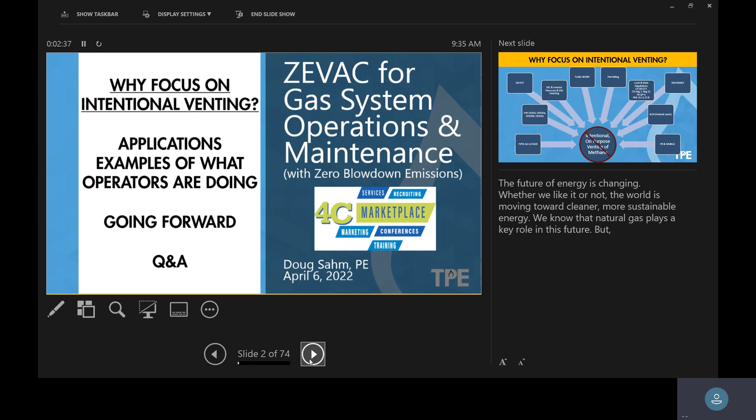So let's see. Is this gonna go for me? Let's see. So we'll start off with why intentional venting. And the short answer is there's a lot of reasons that intentional venting matters, and from our perspective, it should get focus.

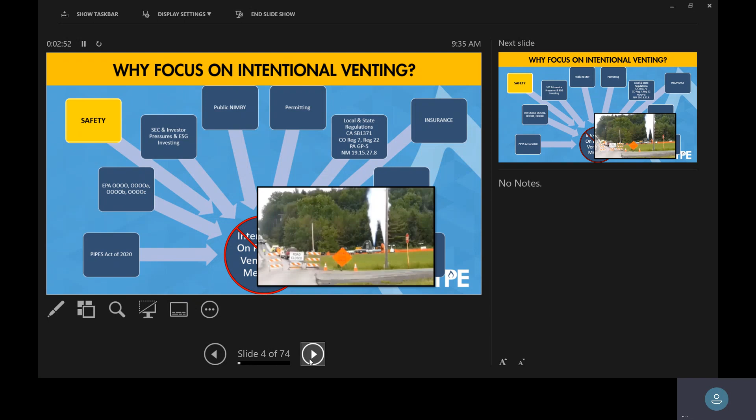The first is safety. So what a lot of people don't know is one of the worst industrial accidents in the history of the world, in general, was a chemical spill in India that takes number one, killed a couple thousand people. In the top 3 to 5, arguably, was an accident in Mexico in 1984 where a facility had both venting activity and flaring activity happening in separate corners of the facility, and due to the conditions that day, it didn't dissipate. So you ended up with a huge vapor cloud that eventually hit the other side of the facility where you had flaring activity, and it destroyed an entire town.

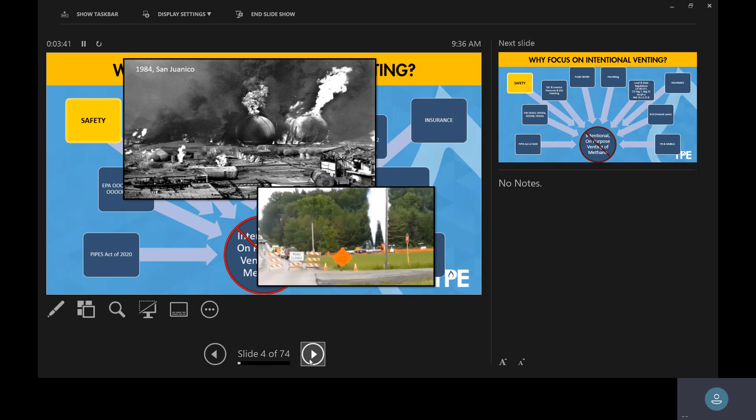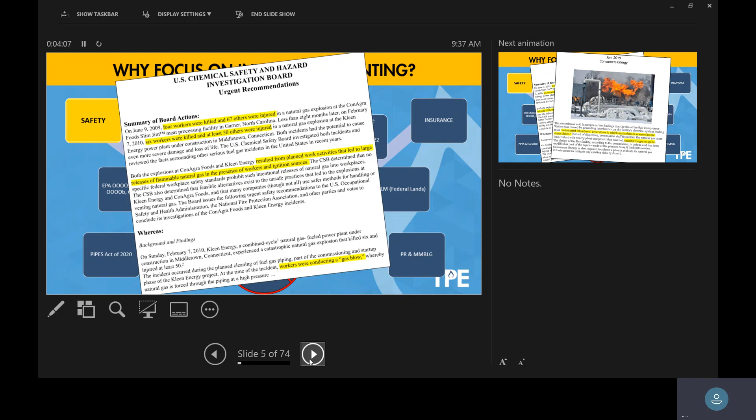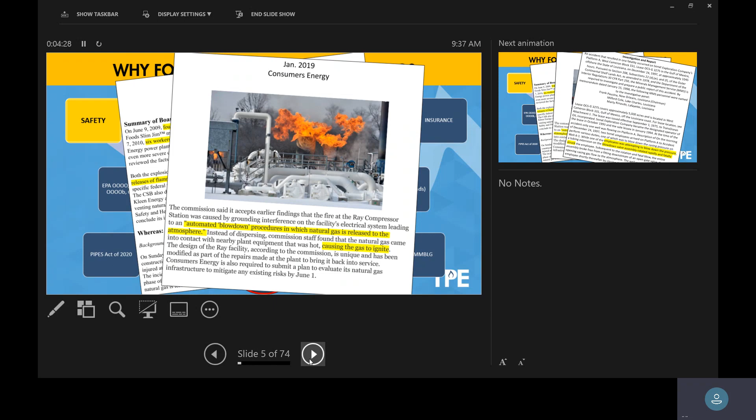So venting has an inherent risk to it, because anytime you release, you create a fuel air mix, right? You are putting two parts of the fire triangle together on purpose every time you do this. And you're hopefully spending a whole lot of effort making sure that third one, the ignition source, isn't there, because otherwise you got the two. So, if you look through the NTSB and the different accident reports, you'd be surprised how many times you have something like a blowdown or a vent or a valve that gets left open, and you introduce that third part of the triangle, and all of a sudden you're there, right? So every time you vent, you have a safety situation, whether you like it or not. You got two out of three present.

So we believe safety is sort of the precursor, and that's what drives a lot of what falls out, which is a bunch of regulation, right?

So our industry tends to see safety leads to regulation like the PIPES Act, which is now being... anybody on DOT pipe, PHMSA? Yeah, so Section 114 of this rule basically says you've got to have an O&M manual update that addresses emissions. You can't do nothing. You have to do something. We're not telling you what, but you've got to do something. So figure it out. So that's in effect now.

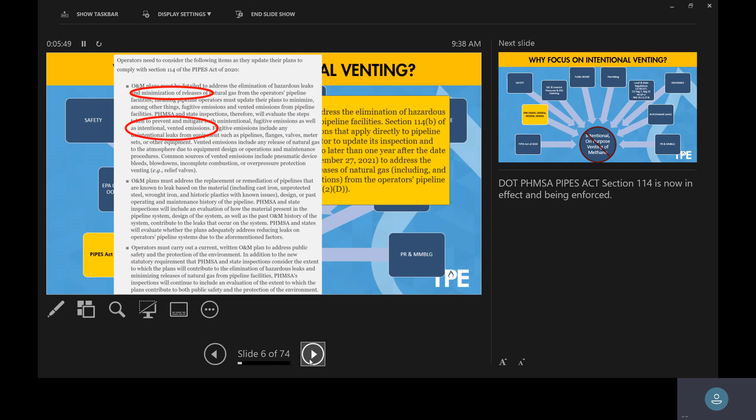And what you're seeing here is kind of this confluence of the way liquids rules are all written, right? Liquids has always been very environmental focused. I do not want to spill oil, right? The gas rules have always been public safety, and you're seeing this pushing together of the way those rules are written. So you're seeing more environmental stuff on the gas side, and the liquid side largely has picked up the safety aspect of the regulations.

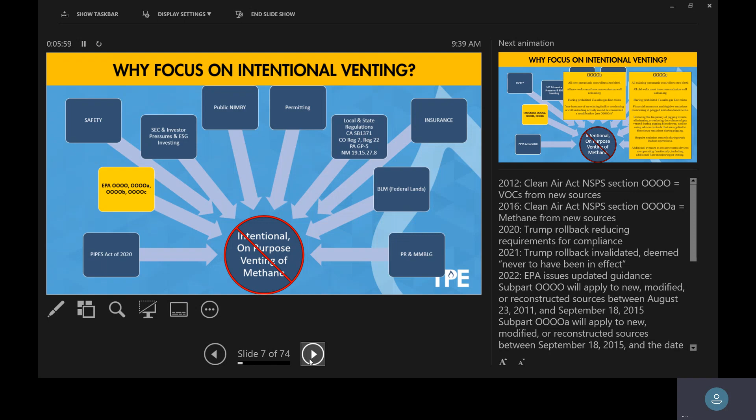The next reason intentional on-purpose venting matters is the EPA. Quad O, people have familiarity. Quad OA came next. Quad OB and OC guidance has been issued. Final ruling probably this year. This is a big deal. Quad OB talks about retrofitting. You can't have liquids unloading. You can't have flaring. I mean, there's tons of, you can't have venting associated with liquids unloading.

And one of the key phrases in Quad OB is that any instance of a well unloading pulls you into Quad OC. Quad OC is the biggest regulatory shift that I have seen, because this is not about new facilities. This is about everything that's already out there. Quad OC is about going back to your old stuff and bringing it up to the latest and greatest. This is a huge deal. This is maybe tens or hundreds of billions of dollars. Quad OC is a big deal.

And it is very hard to imagine that intentional releases are going to be a thing that's okay when they're also making everybody go back and catch every little bleeder, every valve actuator. You're not going to be allowed to blow down to fix this stuff, right? You're not going to be allowed to vent the facility to address this. These are huge.

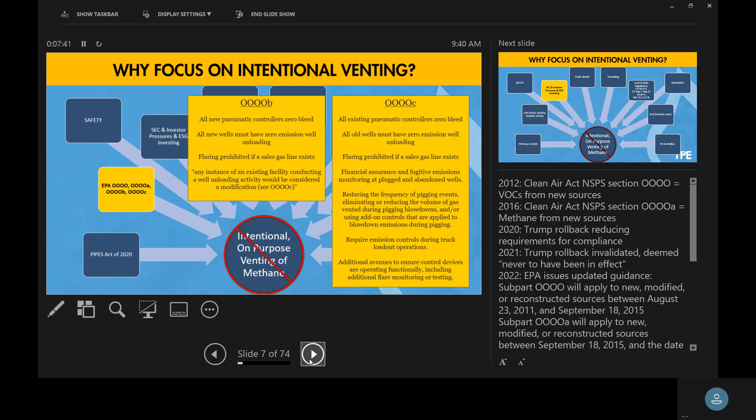Right, the one that makes the news nowadays is the investor stuff. So anybody can Google it, and I can now pull emissions data by producer, by basin, ranked by production versus emissions. So if I'm an investor that is touting ESG or any of these metrics, this data is coming out, right? There's people flying these drones. I mean, they're all over this conference, right? All the satellite folks, they're putting out how much emissions these guys have versus production. This is a big deal. And everybody can get to it now, right?

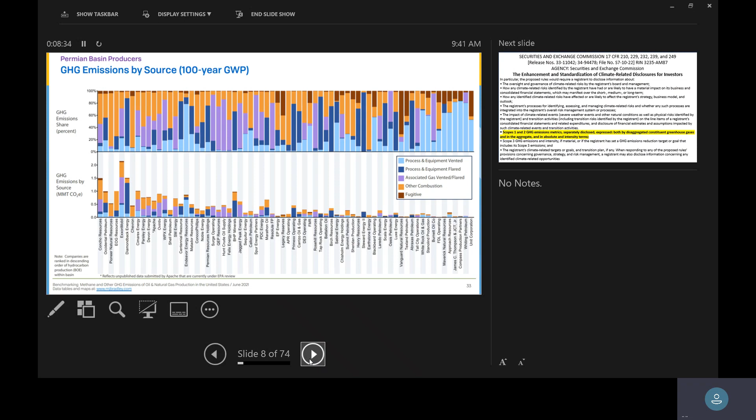So this changes what used to be something I would consider sort of an internal thing. Like we even know, but nobody else really knows and can't stack us against each other. You can now. And so this is going to end up mattering, right? And then, so you get data like that coming out, and then you get the SEC. So this is really important and, I don't think, well understood by our industry.

The Securities and Exchange Commission came out and said, your sustainability reports, the environmental stuff you publish, counts as a disclosure. Just like your audited financials, this is now a thing that can be audited. So you can't just make up whatever you want to sound good and put it in these Going Green reports. You now have an audit trail that has to go with it. So when you say we're going to reduce emissions by 30% by this year, that's now an investor disclosure, right? That can be audited. So the SEC published this rule that basically said scope 1 and 2 emissions have to be disclosed and quantified, right?

So between the EPA rule and the SEC publishing this, this is a humongous shift in the way emissions are treated by our industry, because it used to be very voluntary, very do your best, effort counts, to it's audited. There's no A for effort now. It's did you do it or not, right? You're going to get people like PricewaterhouseCoopers, Deloitte, right? These people are now going to be auditing emission stuff. This is a big deal, and I don't think very many people know about it.

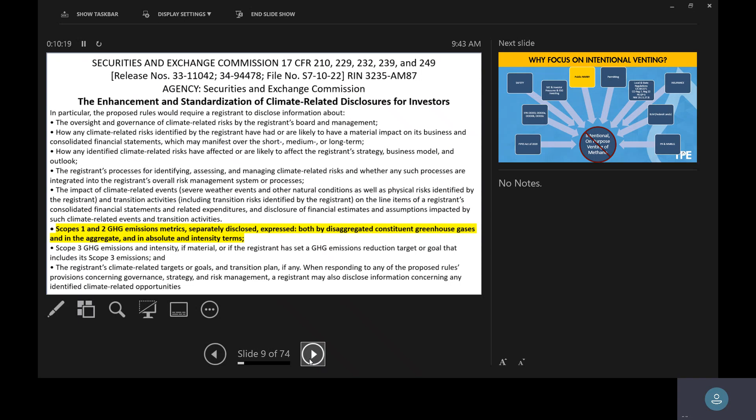Who's tried to get a permit recently? Right? It's really hard. If anybody listens to any of the public comment periods or the town hall, this is brutal for our industry as a whole. The not in my backyard problem is very hard to tackle with any kind of credibility when you also blow gas, when you also do blowdowns, and then you're trying to convince the public, please let us build this thing in your neighborhood.

Trust us, we're good at it, it's clean. But what I'm about to do is going to shake the ground, right? This is hard to rectify with the public. And FERC, so the federal permits, right? These are the big pipes, big import-export terminals, the Federal Energy Regulatory Commission, right?

Their whole mission from the government is to make sure a project serves the public good. And they came out and said, in order to do that, we have to understand a project's greenhouse gas emissions. So what you're seeing across the EPA, the DOT, the SEC, and FERC now is this tectonic shift in the way regulation of emissions is happening, and it's changing dramatically toward the way the liquids world works.

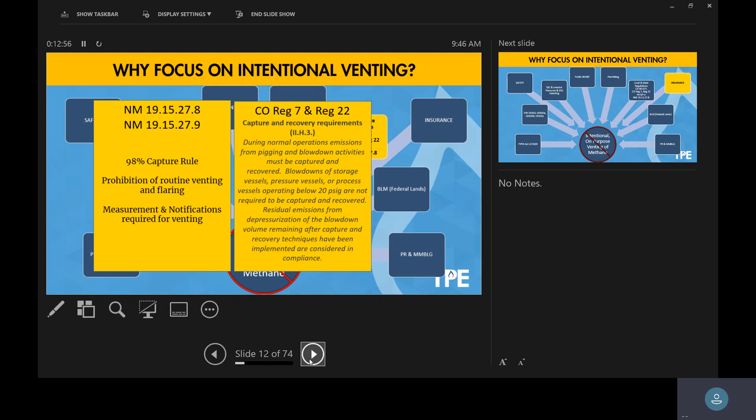And tactically, right, New Mexico, Colorado, the states are advancing faster than the federal, right? But they're all headed to the same place. Anybody operate in New Mexico? Yeah, it's fun. Colorado's right behind them. Maybe you argue they're ahead if you're trying to build anything new in Colorado. You get into the detail.

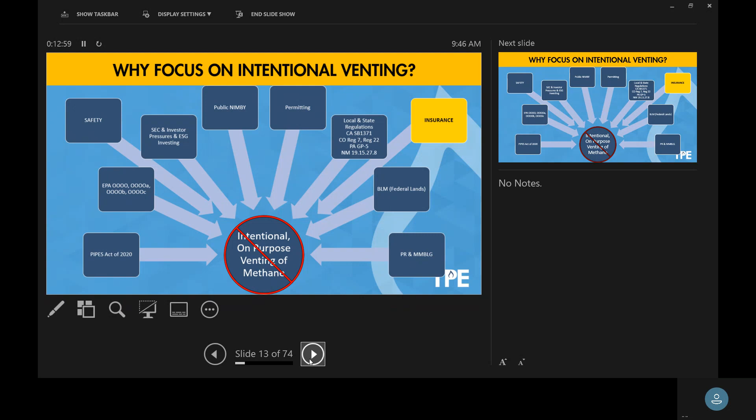The way insurance policies work. Insurance is structured to start with your GL, right? We're oil and gas, everybody has big insurance, it's in all your MSAs. Every single company, every contractor goes out and gets these big liability policies so that if you hurt somebody, you have an accident, there's insurance. Since the 80s, most insurance policies carry a total pollution exclusion, which means none of your GL covers pollution.

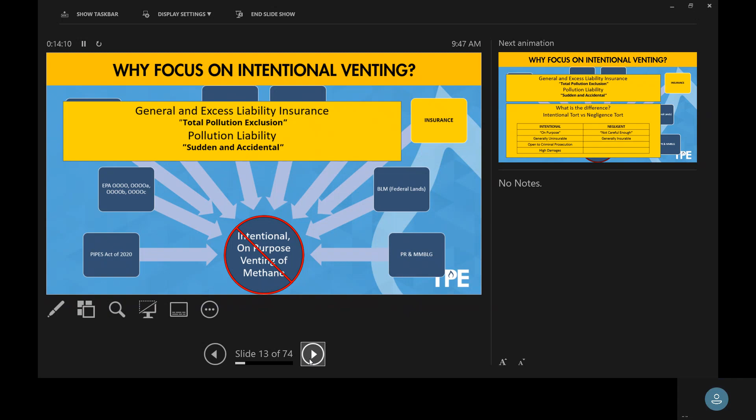So then everybody who cares about pollution goes out and gets a pollution policy. Pollution policies are written to cover sudden and accidental pollution. So we have an accident, something happens, and there's a release of something, right? That's sudden and accidental pollution. There's an insurance policy that kicks in that covers the remediation and fixing it all. What is excluded from all these policies is anything that's intentional.

And this is just the way the legal system is set up, right? If you accidentally hit someone with your car, you have an auto liability policy that covers that accident. If they find out you were texting with your buddy and said, I'm going to hit this, and then you go do it, you think your insurance policy covers that? No, it's a felony. It's treated totally differently. By insurance, by legal, intentionality isn't covered by insurance, and it generally opens up criminal or punitive damages.

So if you hurt someone by accident, it's an insurable thing. If you hurt someone and it's in one of your procedures to do it that way, it opens up punitive damages. So as these regulations come, companies are going to have to look at the way their insurance stack and contract stack works. If you intentionally blow stuff and trip over these rules, your contractor's insurance isn't going to cover it. There's an insurance gap when there's intentionality, because the coverages don't generally cover things that are on purpose.

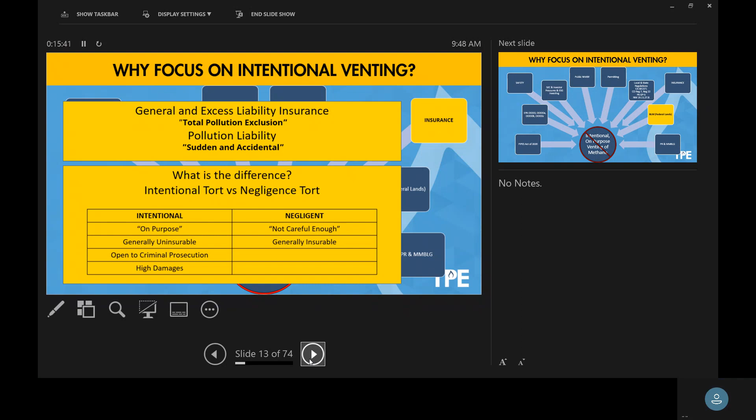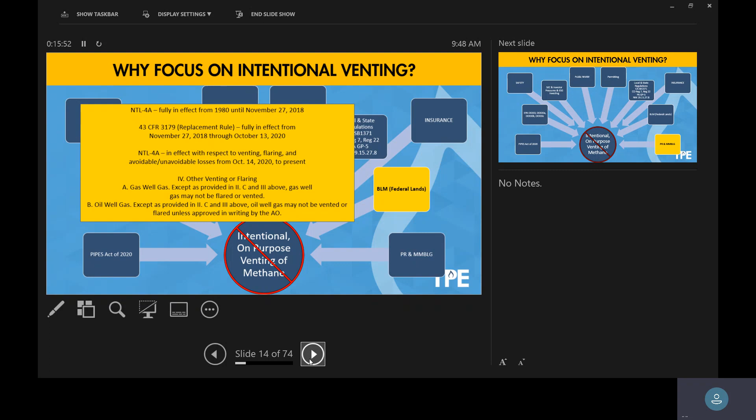Federal lands, this is another one where if you're in it, you're all the way in it, and it's a big deal. If you're not, it doesn't really matter to you. But federal lands have some really strict rules around venting and flaring.

And then PR, right? Who works for a company that's doing ESG PR? Anybody putting out, we're super sustainable, right? We're putting out these ads, and if you've seen any of the literature coming out of our entire industry, there's a huge PR problem for our business, where nobody wants to be coal, right? In the 70s, natural gas was the clean energy future of the world, right? And somehow we have lost that footing.

And my opinion is we need to get it back through storytelling, right? When Texas froze solid and everybody had no power, we should have had ads on TV of a guy who has natural gas. He's had his fridge on, all his friends over. They are watching TV in a hot tub because he's all natural gas, right?

Like, we need to tell good stories about natural gas, and we don't do a great job of it because most of our industry is about the less I'm seen, the better I'm doing, right? Put my pipe underground, nobody even knows I'm here. Perfect. Like, we have got to get a better handle on PR as an industry.

And then, of course, there's MMBLG. Is anybody familiar with that? It affects every single one of you, I guarantee it. Make my boss look good. Right? So when you talk with most people who are thinking about their company for the next 10 years and thinking about who's going to lead it into the future, one of the things that I try to tell the younger people is

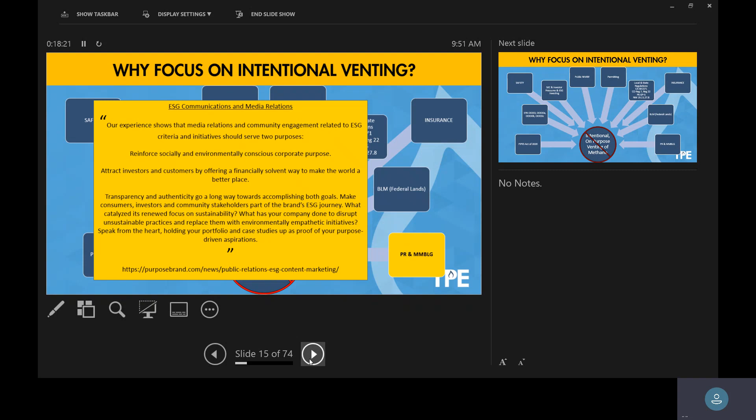So make your boss look good. Go do your project without blowing it down. Tell them about it. Use it for PR. This will go well for you, right? So all those things, they're all putting this pressure on intentional releases. Doing this on purpose, blowing gas on purpose, a million reasons why not to do it. Well, wait, there's more.

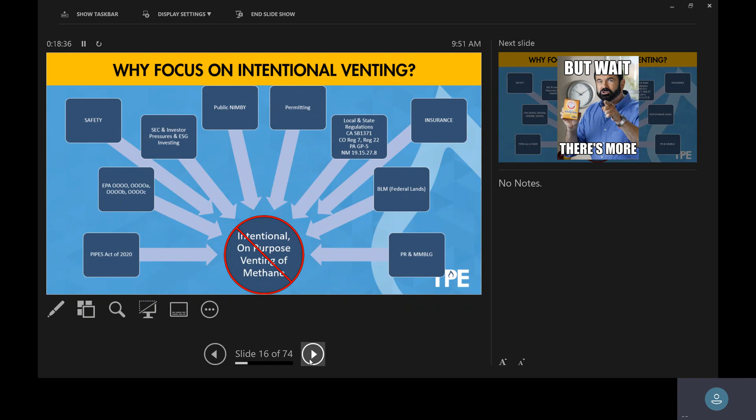Company culture. Our industry does a tremendous job of pushing a safety culture, right? How many of you are in a safety meeting every morning? Safety moment at the beginning of every meeting, tailgate meeting, JSA. We do a really good job of pushing safety all the way down to every pair of boots we have. Do a great job of pushing safety culture.

How would it go in one of those safety meetings where you ask your guys, you're signing off the JSA, right, passing it around, and you're talking about every hazard that's present on this job. And then you say, like, this time, just go do it. Like, forget about all that stuff we just talked about, go do it.

The not safe, right? When you talk about pushing a culture of environmental stewardship or sustainability into your company, you can't have all these meetings. You can't have all these sustainability meetings. Here's a new policy, here's a new program, here's a new initiative. But today I just need you to go blow this down so we can work on it.

Right? You can't get a culture shift when you have this caveat for, yeah, we're supposed to find every leak and fix it right away, but blow this down. Just let the gas go. Right? You just can't reconcile that. Right? And the other version of that is the way we appear to the public. So if I'm a gas company and I'm preaching to the public, we are a sustainable industry, we're a sustainable utility, we are really good at this.

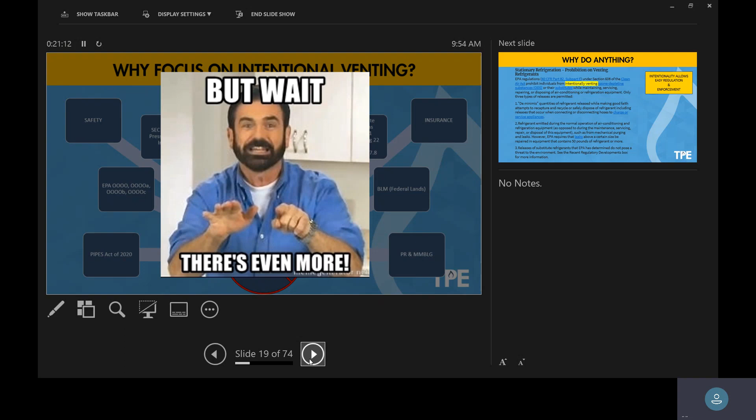But wait, there's even more. Intentionality of releases is a legal framework from the refrigerant industry that is completely written around intentionality. So having a leaky refrigerator is not against the law.

Releasing Freon is a federal crime. You can look up Clean Air Act violations and find guys who go to federal prison for stealing refrigerators because they undo the tubes and take the copper out. What they get strung up on in court isn't stealing copper, it's the Clean Air Act, because venting it is a federal crime.

Doing it on purpose, stealing air conditioners off a construction site when there's no refrigerant in it, is like a misdemeanor, depending on how much the AC is worth. But doing it once that Freon or refrigerant is connected, that's a federal crime. So you have a huge legal precedent that's been in place for decades, centered on intentionality.

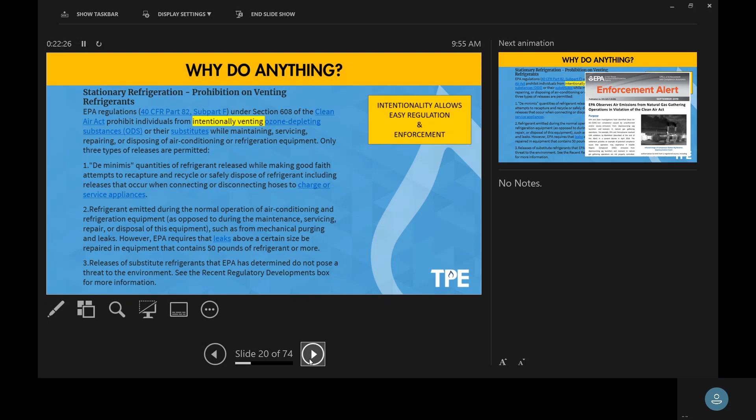And this is already happening. So intentionality brings easy enforceability. If I'm on the enforcement side of any of these regulatory agencies, how do I enforce, 'yeah they probably should have gotten to that leak quicker,' or 'it's a leak or a line strike,' or 'this rod packing wore out before its maintenance cycle and they had some emissions'? That's really hard to enforce.

But catching somebody on camera, opening valves, blowing clouds into the air - this is handcuffs. These guys got handcuffed out in the woods. They put the pigging-out technicians in handcuffs, Department of Justice, guns. This is a real thing that happened.

It's public, I'm not spilling anybody's dirty laundry, you can read about it. But when you talk to these guys, they're like, what was I supposed to do? This is my job, I have to go blow down pig barrels, put a pig in. This is what I do every day.

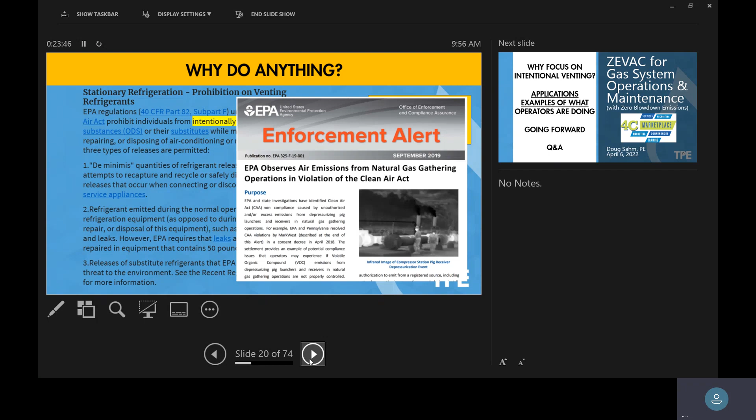Intentionality brings enforcement because you're getting caught. It's not a 'show me all these records and let's figure this out and talk about how you can do better' situation. We're talking about handcuffs. So what's anybody doing about it?

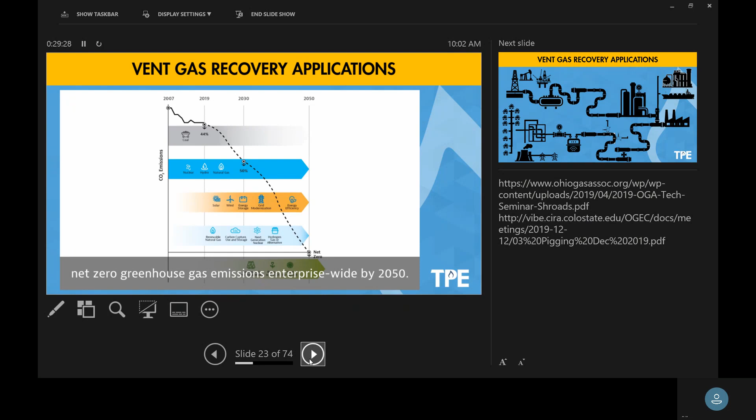So when we look at vent gas recovery, which is sort of a generic term for instead of releasing it, we're going to recover it somehow, the spectrum of work varies a ton. So when you think about

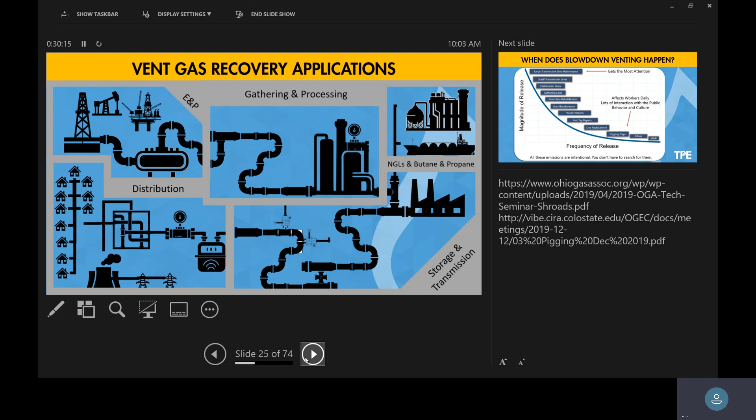all of the places in our industry that venting happens, we tend to chop it up by what the companies do. There's usually E&P type work out on the well pad, gathering and processing - your wet gas gathering, your pigging work, your gas plants. After the gas plant you have two worlds: the NGL refined product world, and the gas transmission compressor station, big pipe world. Then at the other end you get the distribution companies who are in the neighborhoods and urban settings.

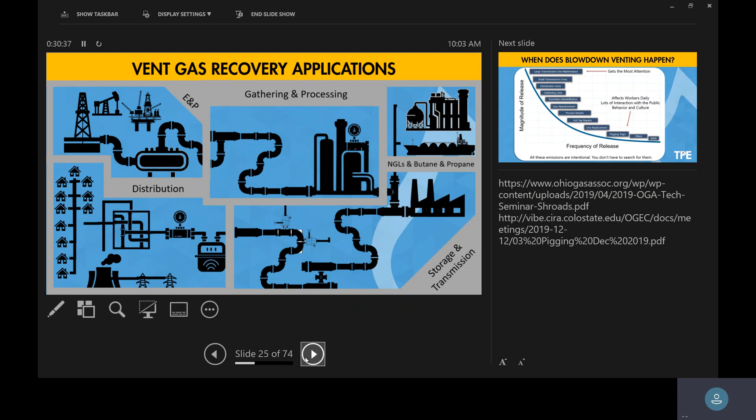And within each of those segments, the venting happens on this spectrum. This is important for companies to understand because it changes the way you go about work. You have some huge releases that happen every once in a while - blowing down 30 miles of 30-inch pipe, you don't do that every day, hopefully. It's a project - there's a project manager, there's engineers, this is a game-planned thing that we're going to go do.

Huge release, relatively not real often, all the way to the other end, where you got guys changing filters, doing compressor maintenance, doing meter and regulator work.

This is not a project, this is a big list, and I got 80 of them to do this month, and we go to work, right? So those releases tend to be much smaller. Blowing down a meter skid to do a meter prover or something like that, it's tiny volume.

We have crews that do it every day. And this is exaggerated when you talk about gathering pigging, like launching a pig. It's not a big volume. You run 100,000 pigs a year, which some people do. Now you're talking about something, right?

Same thing, distribution companies. Who's got gas at their house? You guys got the meter where they can read it just by driving by, right? Or pick it up on Bluetooth. I'm not sure exactly how it works, but they don't have to come look at the dial anymore.

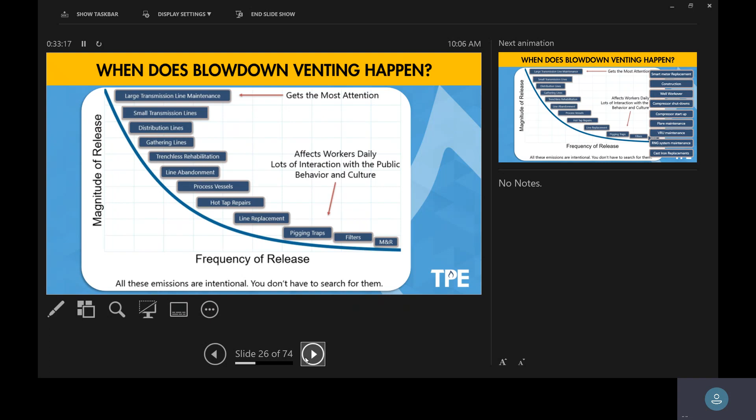So you really have to look at this stuff on a spectrum where the impacts are different, right? And that's just a small list. There are tons of examples of this stuff. So I'm going to fly through these, but this is just a cross-section of what exists, right?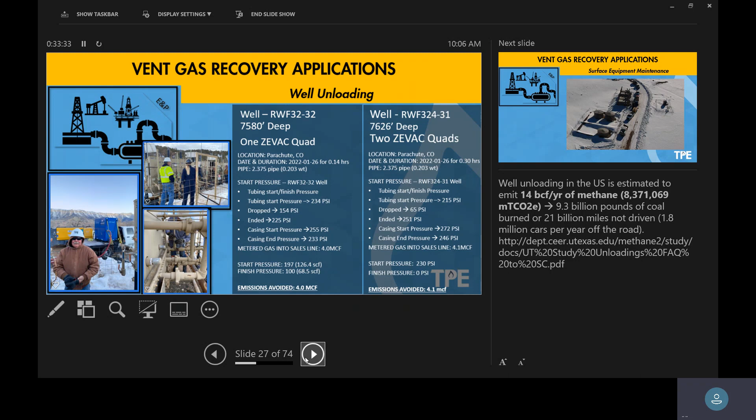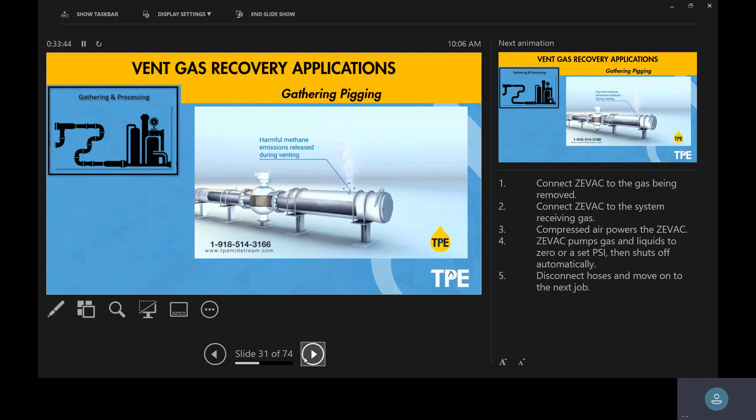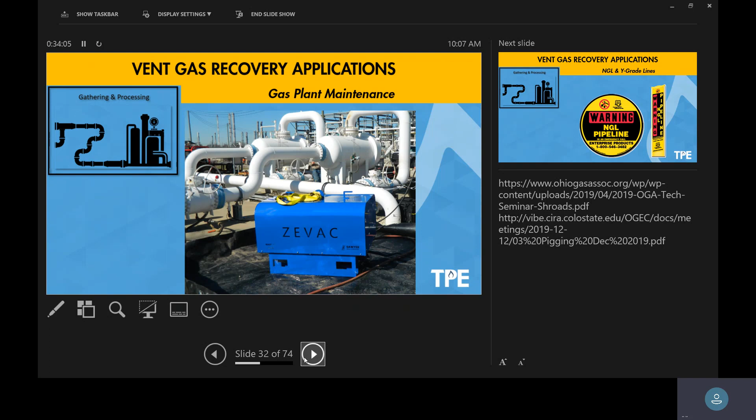You get into gas plants. Gas plants have a maintenance crew, right? That does nothing but maintenance all the time. Valve maintenance, control systems maintenance. Generally speaking, you have to blow things down to work on them, right? It's not safe to weld on something with a bunch of gas in it. So there's a lot of blowdowns that happen in gas plant maintenance.

You get into NGLs and Y-grade, especially in the wintertime, you can't get this pipe empty. Even if you opened all the valves, it won't empty, right? Because the butane in the winter doesn't flash. It takes forever. A lot of flaring work where we get involved with pumping these products out.

Has anybody ever worked in the terminals, like a marine terminal? I'm sure some of your companies have facilities in terminals. In a terminal, most of your ships have extremely automated fire control systems. They call it fire eyes, right? It's these infrared sensors that look for flame and kick on all the foam systems.

You think you can light a flare in one of these? You'd cause a soap suds foaming event on all these big ships, right? You can't vent in these places. There's too many uncontrolled ignition sources. You can't flare because you'll set off the fire control. Doing maintenance work in a facility is very hard. So we get involved in a lot of these situations where you don't want to vent it, you don't want to flare it.

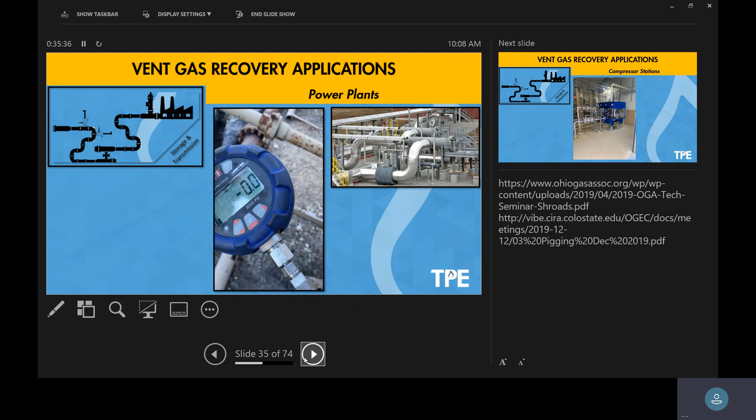Vent gas recovery makes a lot of sense. Power plants are the same way. You're on shared right-of-way, you have high energy electric, typically on your right-of-way. Nobody wants to blow a cloud of flammable air up into a bunch of power lines. Next best, okay, well, we'll flare it. You think your power company is going to let you flare underneath there? No, right?

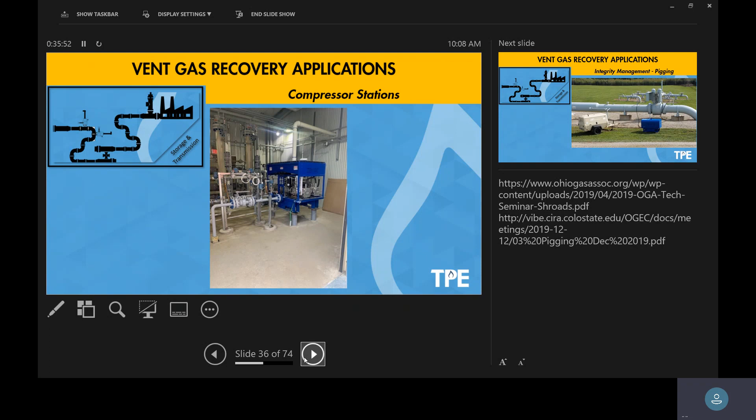So we do a lot of power plant work, do a lot of compressor station work. These are usually permitted facilities. You get these calls around October, November. I've run out of my permit emissions, now I can't do any maintenance. Come help. We do a lot of that.

Integrity management, pigging work, lots of pipeline repair work. Right? You don't get to pick your location. You got a problem, you got to go there and fix it.

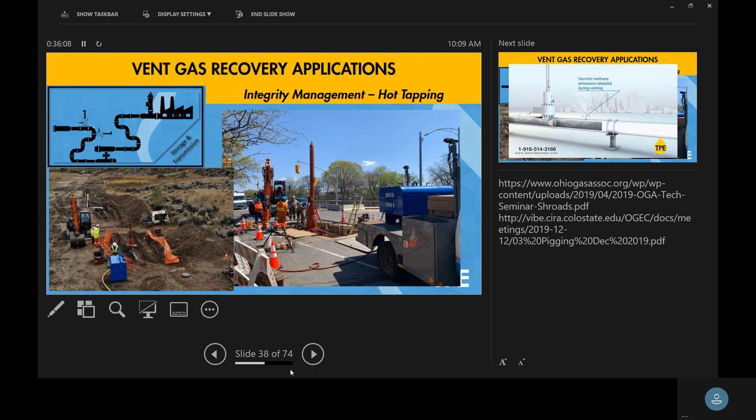Valve testing. I'm going to fly through some of these quickly. Blowing down entire pipelines - this is another application where you don't want to get on the news.

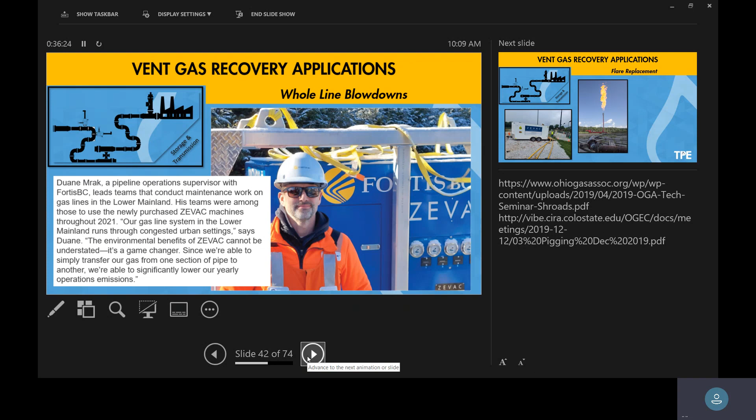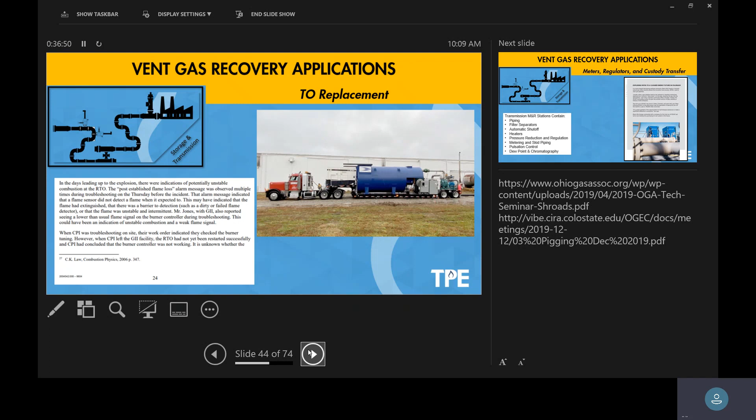Flare replacement work - anybody ever seen a flare carry over? It's like lava, nobody wants that. Gas flaring isn't that big of a deal, but gas flaring with a bunch of sludge that comes up is a big deal. Thermal oxidizers - we do a ton of work where my thermal oxidizer is supposed to be X, and they came out and emissions tested it, and it's not.

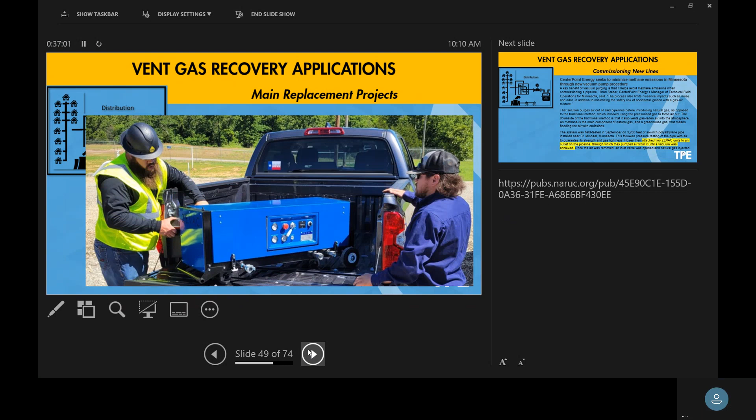So we got to do something else until they get it fixed. Meters, regulators, all this kind of work. And then the distribution stuff, which I understand we don't have a distribution crowd here. Vent odorized gas, you got a problem.

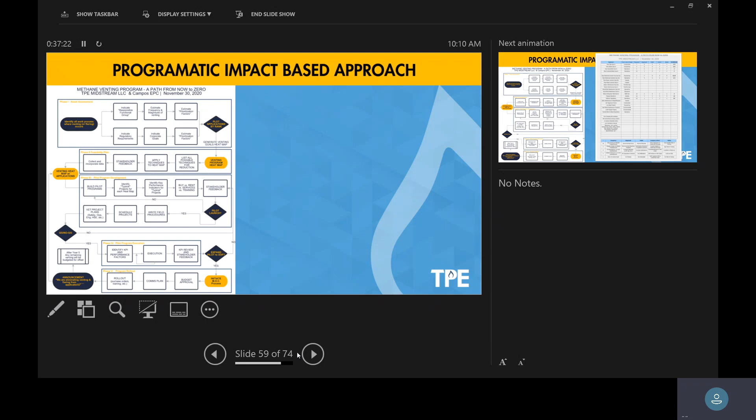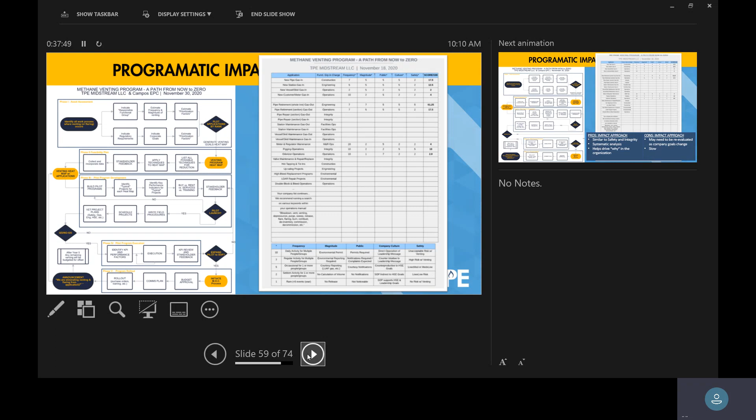What I really want to show you to wrap up is there's a few different approaches companies are taking to tackle this. One is what we call a programmatic approach - this follows what safety programs and integrity management programs do. You rank things, come up with impact factors like how often you do it, how much gas is involved, how close to the public it is, and you rank out all your applications. This starts with an intern searching your O&M manual for release, vent, purge, listing them all out and ranking them. Then you come up with a program where you tackle the biggest impact first and work your way down the list.

We also see a standards-based approach. So who here works for a company they would describe as engineering gets to call the shots? Nobody? That's shocking.

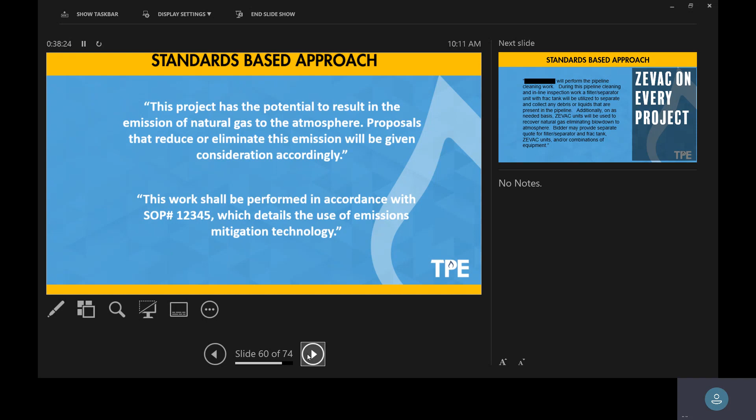Right, so you see this - some companies are taking a standards-based approach where they write it into their bid packages and their contractors do it. You come up with some spec language. Here's an example: pipeline cleaning, there's ILI involved, there's filters, and we're putting this in our language so our contractors start thinking about it. I'm not coming out hard and fast saying everybody has to do this on every project, but if I put it in my RFP, at least my contractors will go Google it and start working on this problem for me.

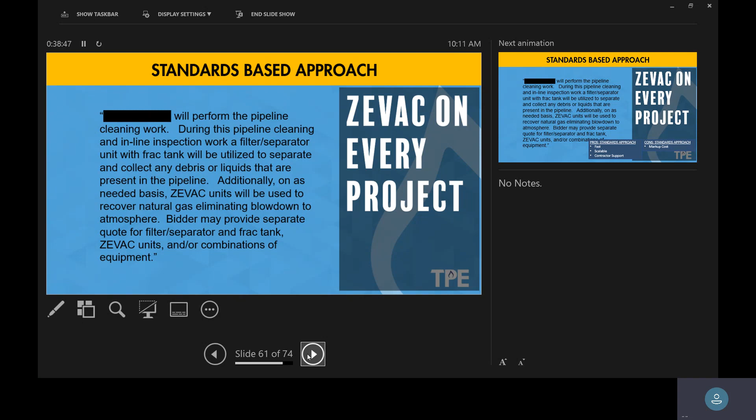We see a cost-based approach too - who's been asked by somebody to look at dollars per MCF? This is kind of the big picture: how much is it all going to cost? In the energy business, 40% of companies have an established cost they're willing to pay or are paying for emissions reduction. That number ranges from 0 to over $100 a ton.

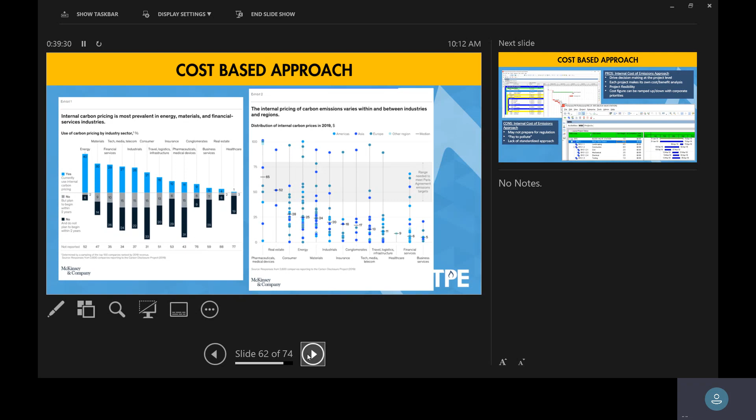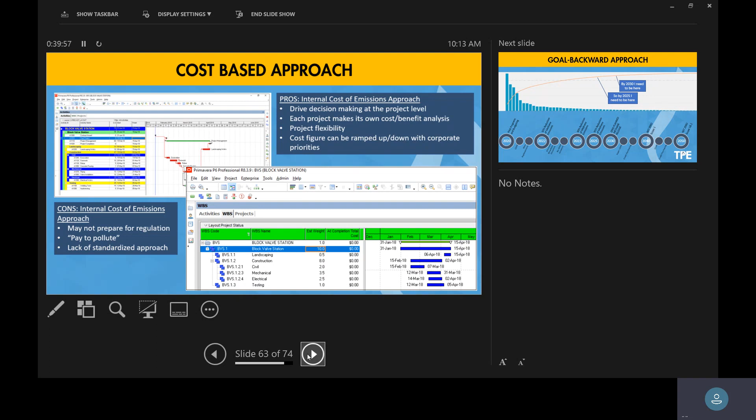By putting these metrics out there - if you publish this in your organization, you drive it all the way down to your project people. You basically say we're going to hit your project budget with $1 per MCF that you emit. So you got to account for it as an ops guy, as a project engineer - we're going to ding you every time you release. Then your operations people, everybody working on projects, starts solving this for you. So it pushes it all the way down the company.

And then we also see this goal-backward approach - this is where somebody's already stated where they're going to be in 2030 or 2050, and they work their way backward. We have companies who have stated they are not going to have planned releases by 2030. They believe to make that possible, they have to be 95% of the way there by 2025, because the last 5% of planned releases will take as much time, effort, and money as the previous 95% combined. You do all the easy stuff first, and then you're left with the really hard stuff at the end.

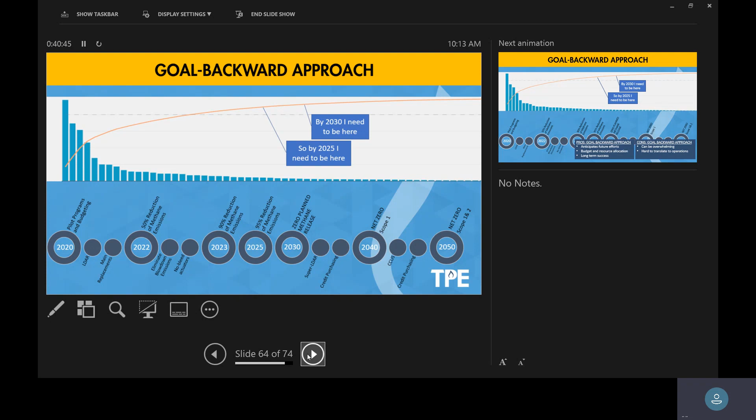So people ask me, how do we get started? There's a million applications, a million ways to do this - how do you get started? You start by connecting with people. You come to stuff like this, you talk to industry people who have been working on it longer than most of us have, and they can give you some guidance on what to do and how to get started.

So with that, that's the end of my prepared remarks, and I'm out of time. I really appreciate you guys sticking with me, and I hope, if anything, blowing gas will bite you in the ass.